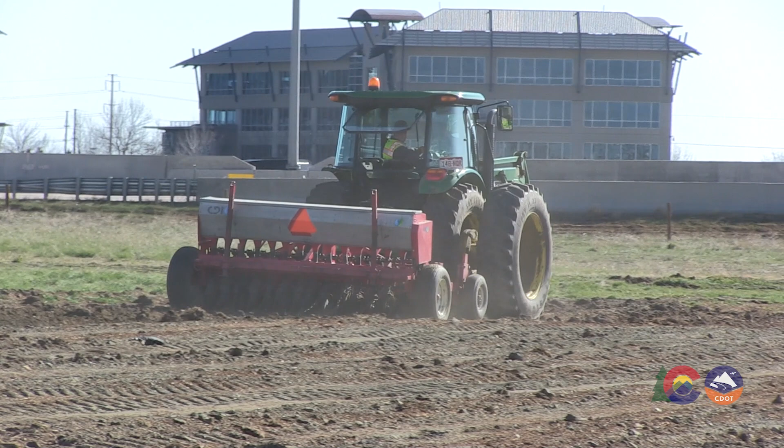What is the drill seeding method? The drill seeding method is a technique used to mechanically plant seed directly into the soil. Drill seeding involves the use of specialized drill equipment that creates small holes in the soil, deposits the seed and amendments into those holes, and then covers the soil over with a roller or chains.

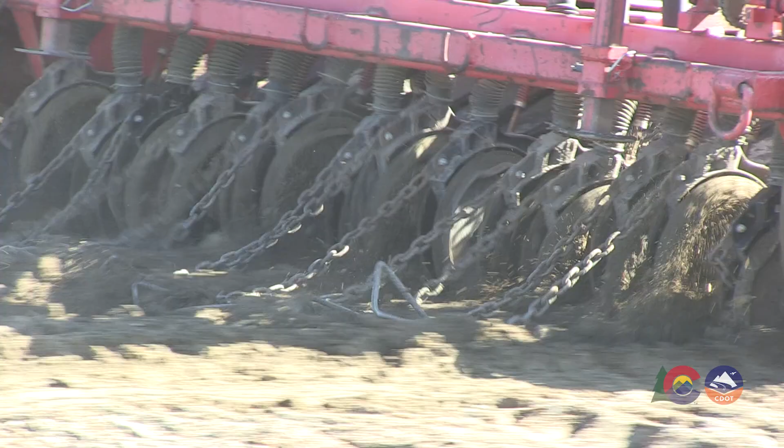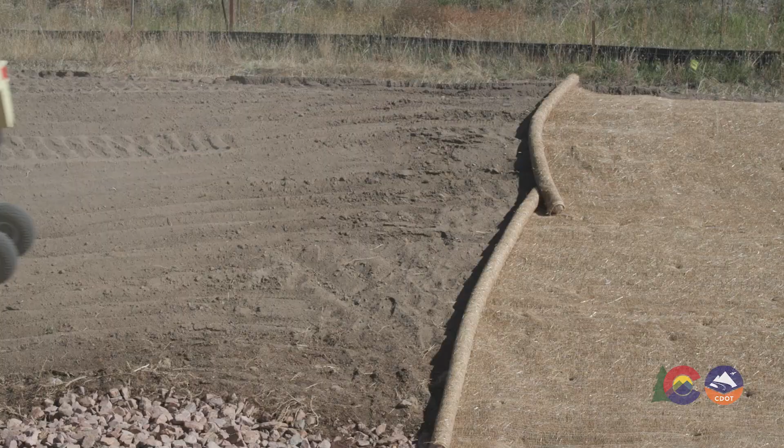This process helps ensure good seed-to-soil contact and improved seed spacing and coverage, which generally provides better germination and establishment than broadcast or hydroseeding. Drill seeding is a precise, efficient, and cost-effective method of planting seed. It can be completed in dry conditions, and unlike the hydraulic seeding method, it doesn't require water for the application. Drill seeding is followed up by final stabilization methods including mulch, crimp, and tackifier, hydromulching, or erosion control blankets.

The audience for this video includes stormwater management plan designers and reviewers, region permanent stabilization subject matter experts, CDOT design engineers, and project design engineers and their designees.

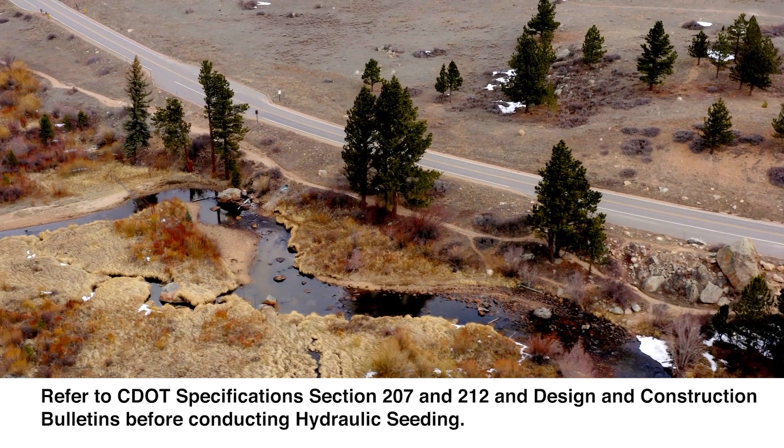Refer to CDOT Specifications Section 207 and 212 and Design and Construction Bulletins before conducting drill seeding. Instructions and guidelines for Specifications 207 and 212 include specific details for subsoil and topsoil preparation, organic fertilizers, soil amendments, seeding methods, and checklists for inspectors.

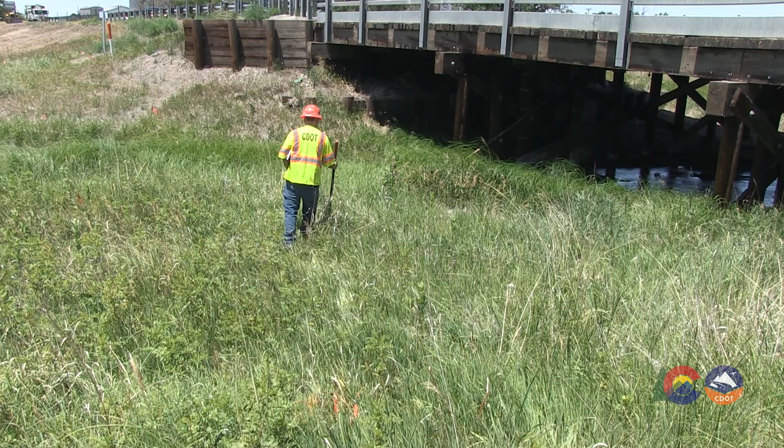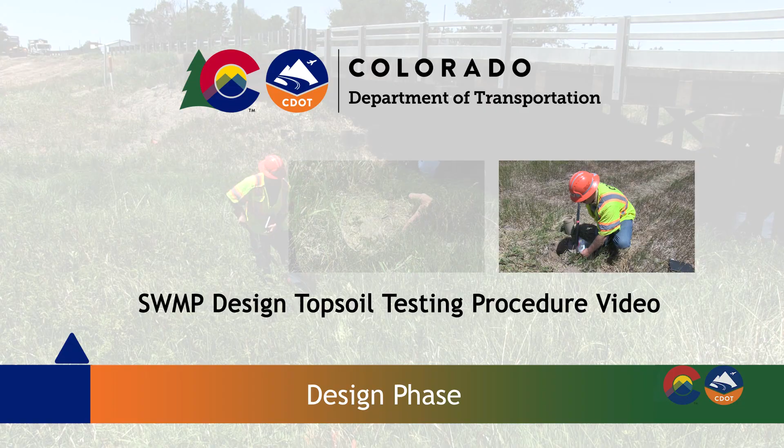The first step is determining seed mixes and amendment rates. For instructions on how to do this, please watch the SWMP Design Topsoil Testing Procedure video. Rates of topsoil amendments are determined in the design phase based on analytical results of the project's topsoil. If not testing site topsoils, then the rates are based on the standard rates in Specification 212. Use your region's standard seed mix for elevation and moisture, or work with the CDOT headquarters landscape architect for a site-specific seed mix and rate.

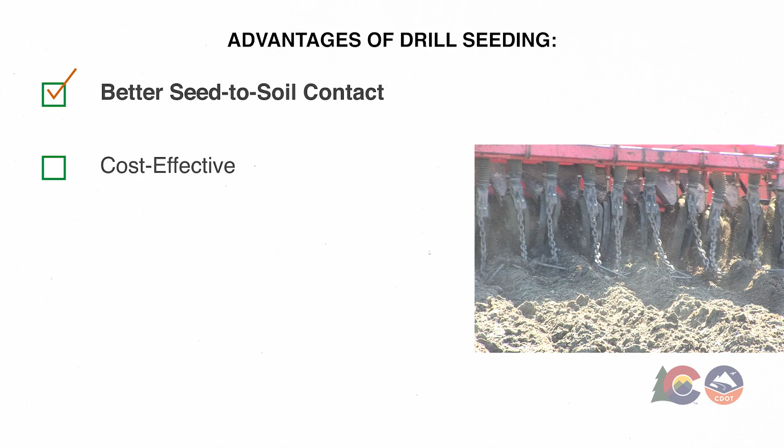Drill seeding is CDOT's preferred method of seeding and offers several advantages for highway construction projects including better seed-to-soil contact, as the seed is placed directly into the soil and is followed by mechanical soil coverage, which can increase the germination rate leading to increased plant establishment. In addition, drill seeding places the beneficial mycorrhizal fungi right next to the seed, aiding in revegetation success. Another advantage of drill seeding is its cost-effectiveness. Drill seeding can place seed and amendments uniformly in a relatively short amount of time.

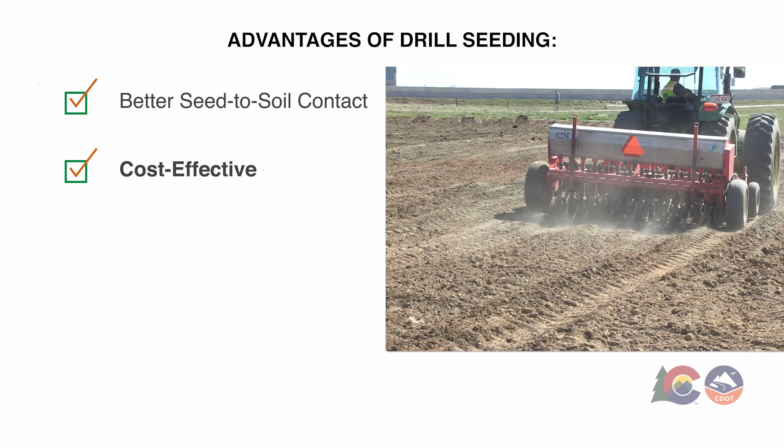It is important to note that while drill seeding can offer many advantages for a highway construction project, it may not be the best option for every project. The specific requirements and constraints of each project should be considered when deciding whether or not to use this method of planting.

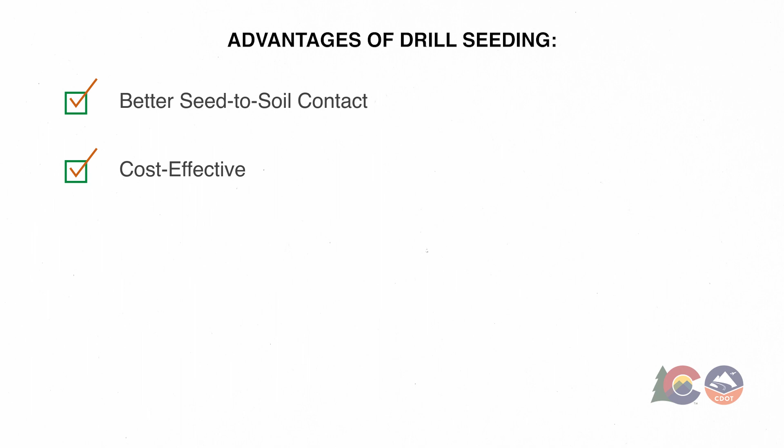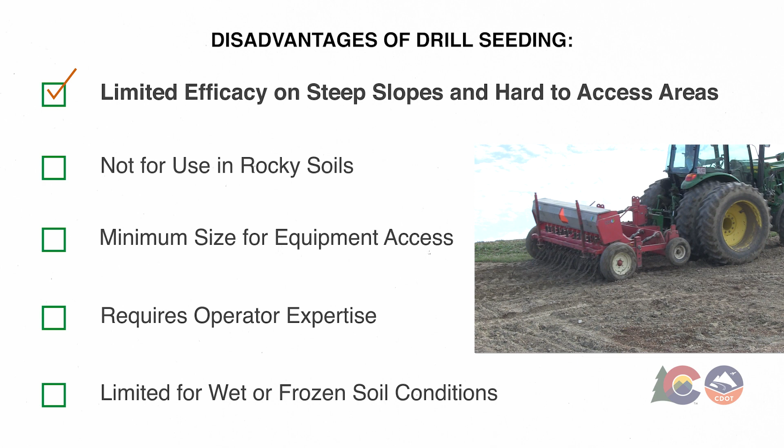There are a few potential disadvantages of using drill seeding for a highway construction project, like limited efficacy on steep slopes, hard-to-access areas, and rocky or clay soils. Drill seeding equipment cannot access steep slopes over 2.5 to 1. Drill seeding cannot be conducted in rocky soils due to potential damage to the equipment. In clay soils, the equipment is unable to get the calibrated depth effectively.

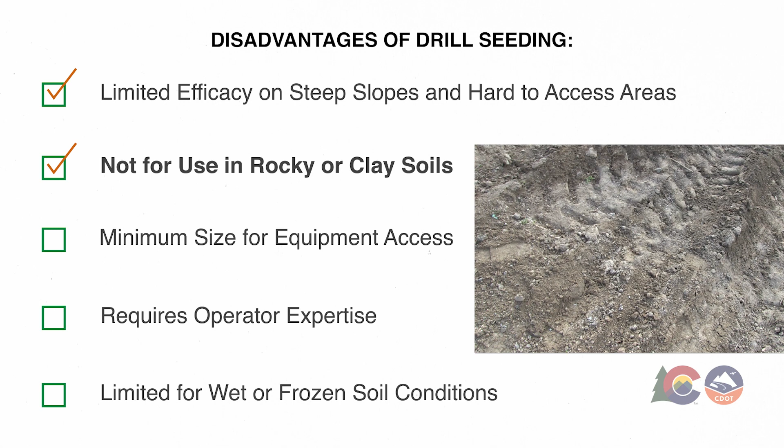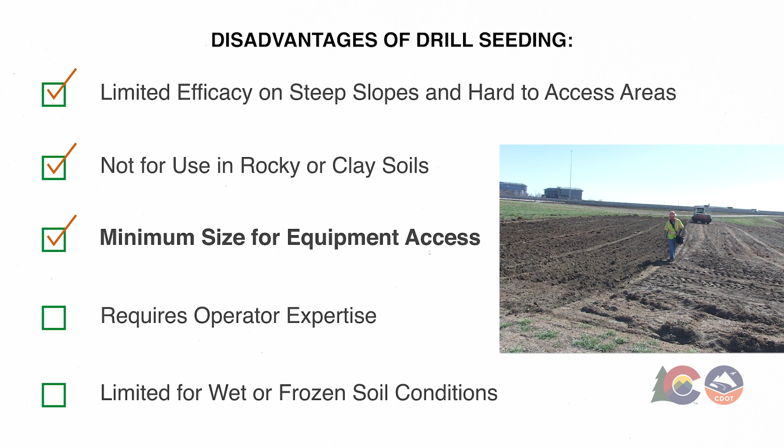Due to cost of mobilization and access of equipment, drill seeding should be conducted on sites half-acre or greater and where there is sufficient space for equipment to access. It requires operator expertise for calibrating the equipment. It is limited for wet and frozen soil conditions.

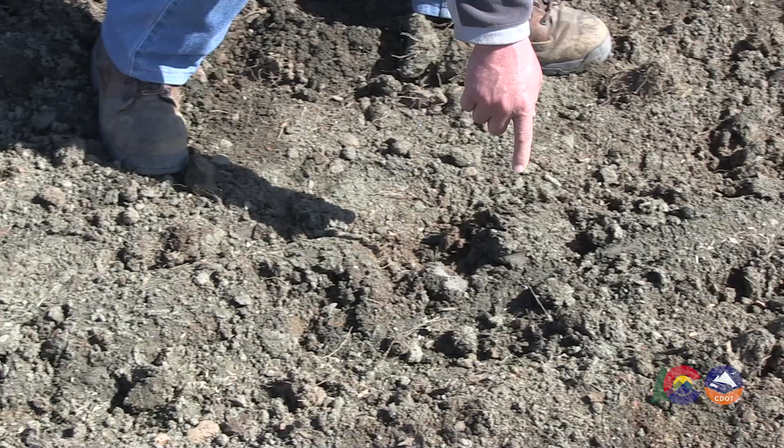Drill seeding should not occur when soils are wet or frozen. Working in wet soils leads to soil compaction. Drill seeding should not be conducted in frozen soils, as the drills may not be able to penetrate the soil and the seed may not be deposited at the correct depth. In addition, the equipment will compact the soils. High winds: seeding should never be conducted during high winds.

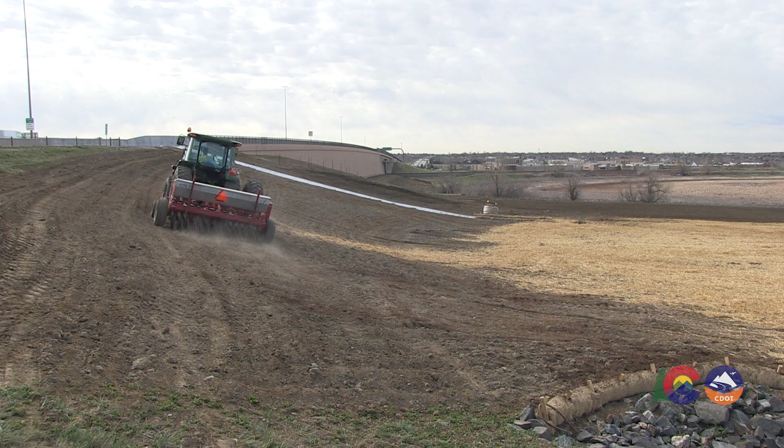It's important to note that although there are some disadvantages, these can be mitigated with proper planning, equipment, and execution of the project. For hard-to-access areas, rocky soils, and steep slopes, the hydraulic seeding method should be specified for installation.

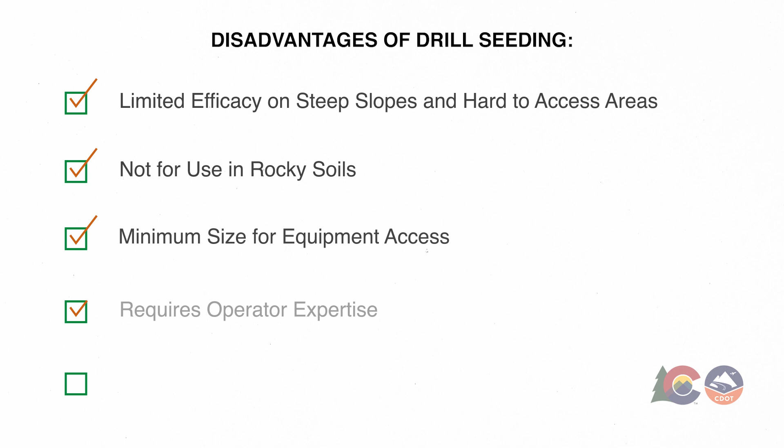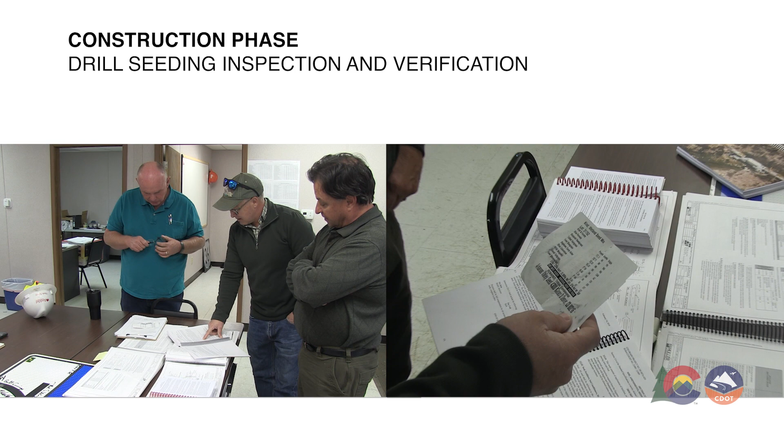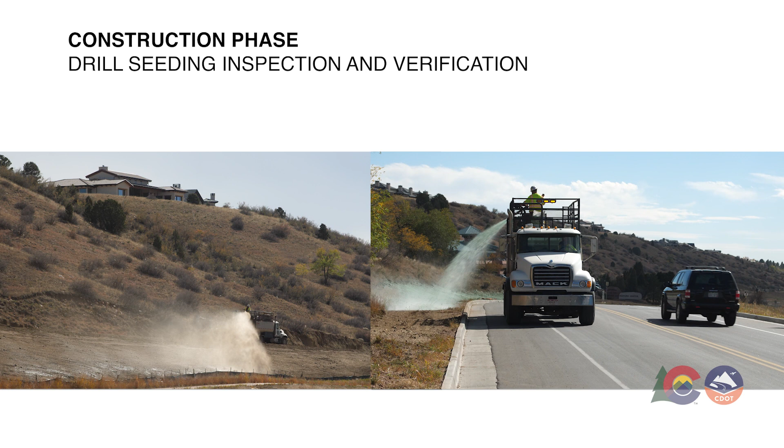Construction phase. Drill seeding inspection and verification. Whether you are a reviewer or inspector, review the contractor's method statement, baseline schedule, and milestones for timing, equipment, and quantities of seed and amendment and their storage needs. Application of organic fertilizer, soil amendments, and seeding should be milestones in the baseline schedule.

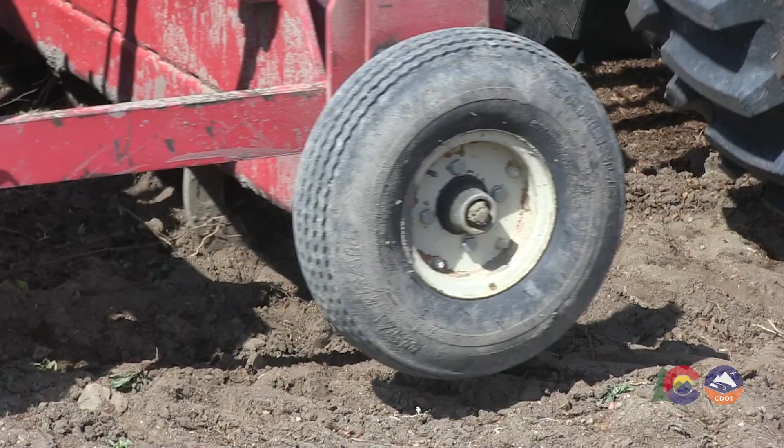The timing of seeding is crucial to the establishment of desired vegetation. It is important to seed during the seeding seasons in Section 212. After topsoil placement, seeding and final stabilization activities must occur within 4 days. Final stabilization, including straw crimp and tackifier, mulching or erosion control blanketing, must occur within 24 hours of drill seeding.

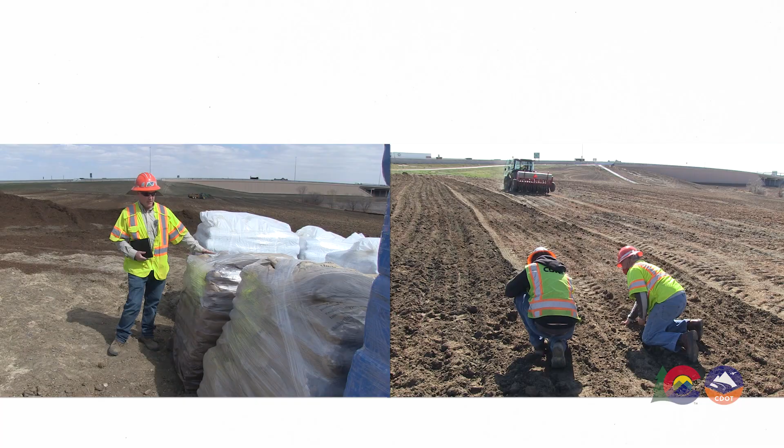Seed should match the species and rates shown on plans. If there are substitutions due to availability with suppliers, work with your region's permanent stabilization subject matter expert for approval of the substitutions. Inspection and verification. Refer to the construction manual for guidance and checklists to assist in review of seed, amendments, and the drill seeder calibration.

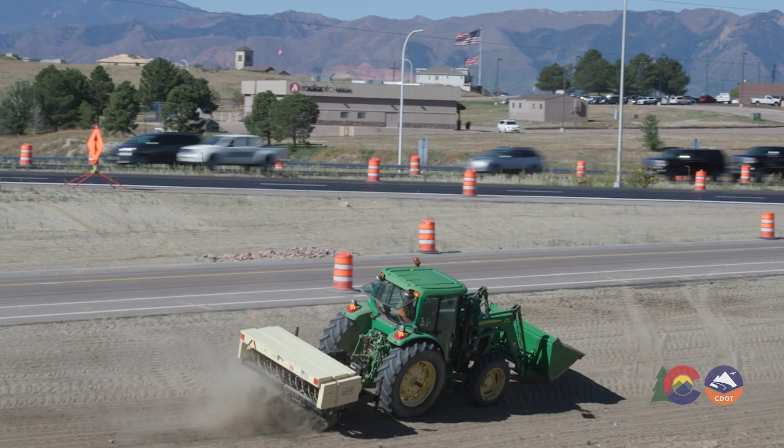As discussed in the Specification 207 Subsoil Preparation video, soil decompaction is a critical component in addition to topsoil preparation to ensure the success of drill seeding and resulting vegetation. Conduct a site inspection. The seed bed should be free of stones and other debris greater than 4 inches in diameter. Review the vendor's packing slip of seed.

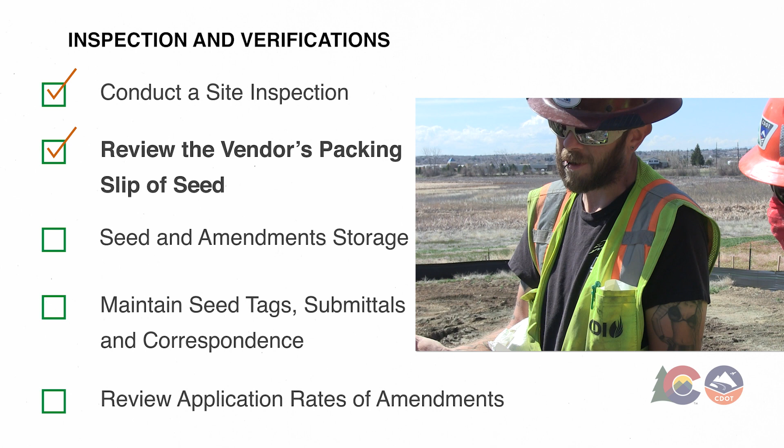Confirm the seed has not been in possession of the contractor for greater than 30 days. Reject seed bags over 30 days old. The packing slip needs to include a copy of the purity and germination report dated within 13 months of date of seeding. Proper storage of seed and amendments.

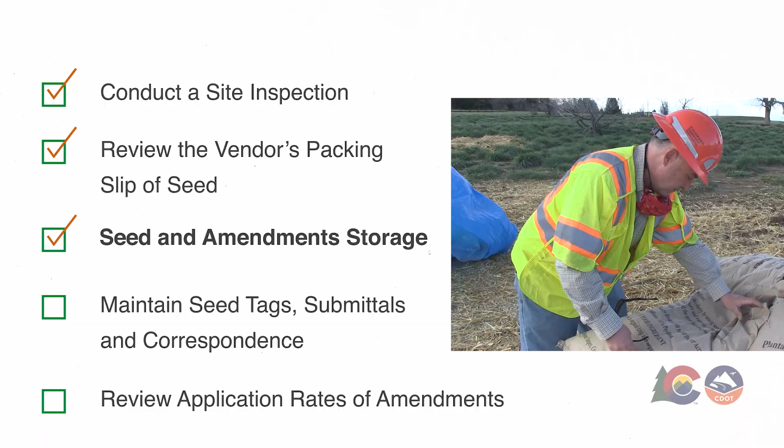Seed and amendments are to be stored out of direct sunlight, surface water, and precipitation, and not in temperatures over 80 degrees that can destroy biotic life in the amendments or reduce the germination of seed. Reject wet, moldy, or damaged seed and amendment bags. Save in the project record seed tags, submittals, and correspondence.

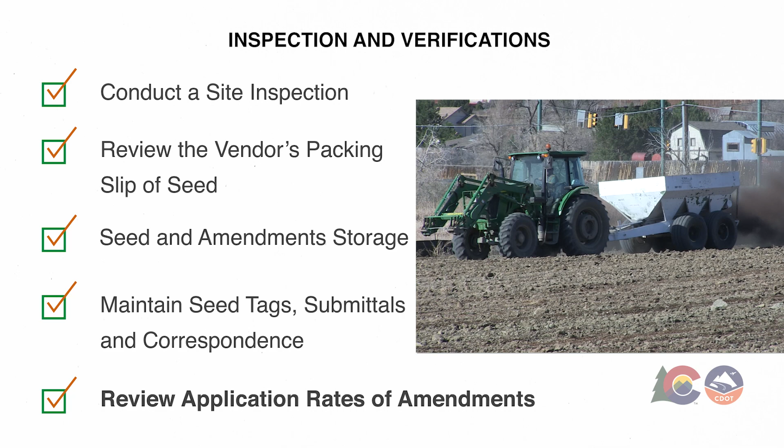Review application rates of amendments. Refer to the contract for quantities of organic fertilizer and topsoil amendments. Seed should match the species and rates shown on plans. Work with region permanent stabilization subject matter experts to help verify seed mix and rate, approve seed and amendment submittals, and answer any questions that may arise during construction.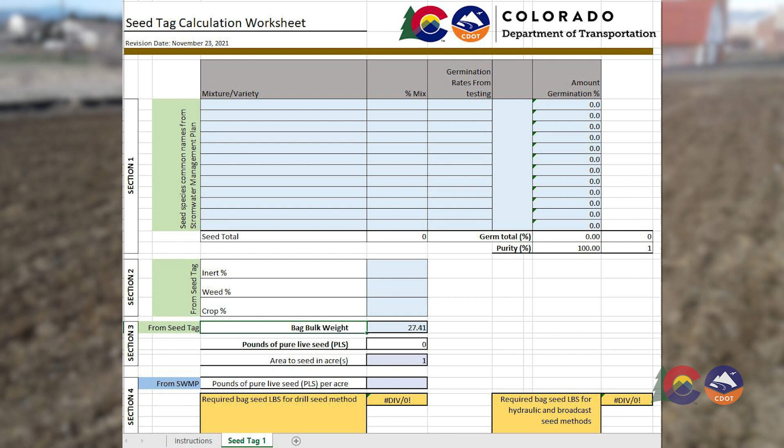A seed tag calculation worksheet and seed and amendment quantities checklist are available on the Landscape Architecture website. Review 212 Drill Seeder Calibration video. Overall, the inspection and verification of drill seeding is crucial for ensuring that the equipment used for seeding is in good working order, that the seeding method is performed correctly, and that the seed and amendments are being applied at the correct rate.

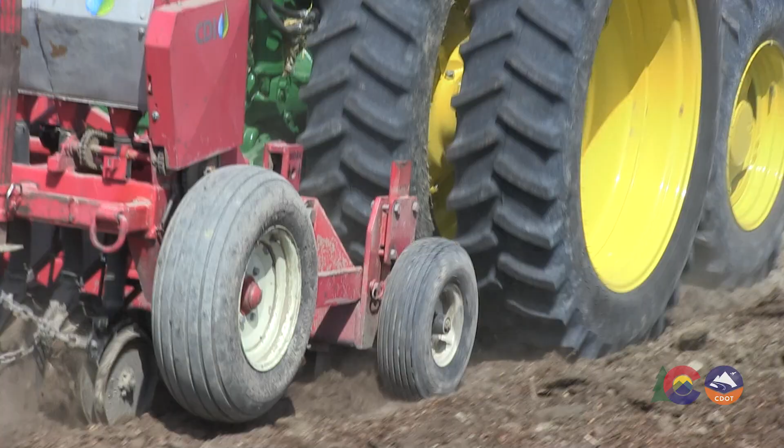Maintain proper topsoil surface conditions per Section 207. The seed bed or topsoil surface should be left in an uneven condition with a surface variation of 2 to 4 inches. This helps prevent erosion, but also creates various microclimates to help with germination. Do not work in frozen or wet soils or during periods of high winds.

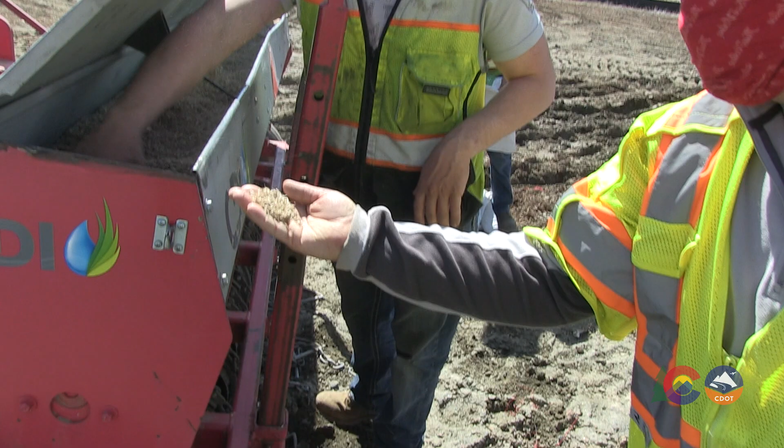Review application rates of amendments. Refer to the contract for quantities of organic fertilizer and topsoil amendments. Seed should match the species and rates shown on plans. Seeding rates should be as specified in the plans. With seeding, more is not better.

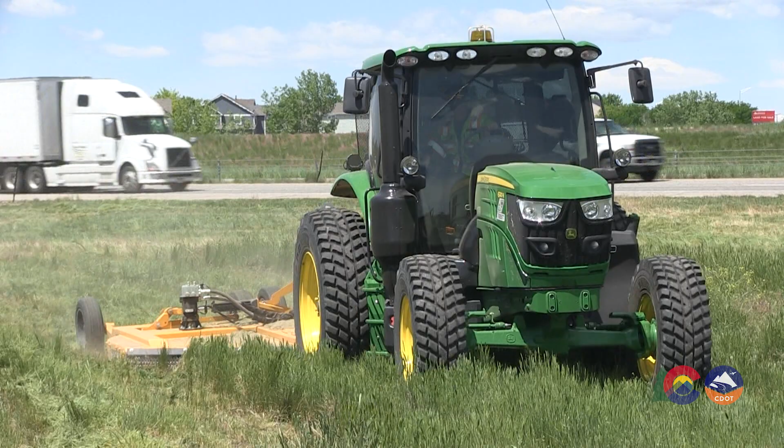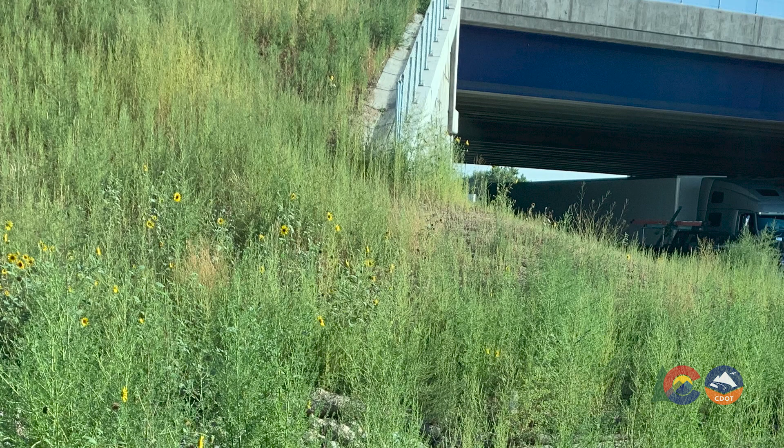Adding too much seed results in a vigorous initial establishment, but in the long term, there will be less vegetation due to the seedlings' competition for sun, air, nutrients, and water resources. Underapplication of seed can lead to increased growth of weeds where surface soil is exposed, as well as increased potential for surface erosion.

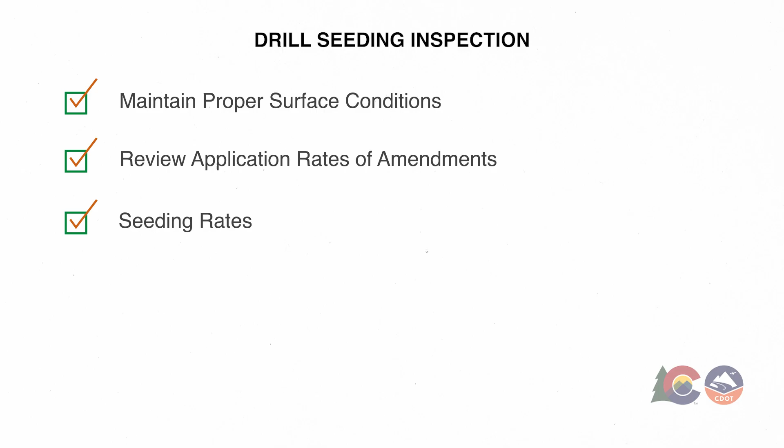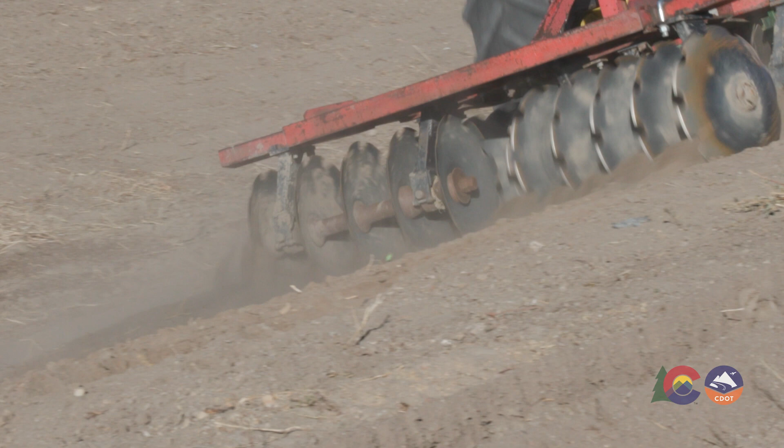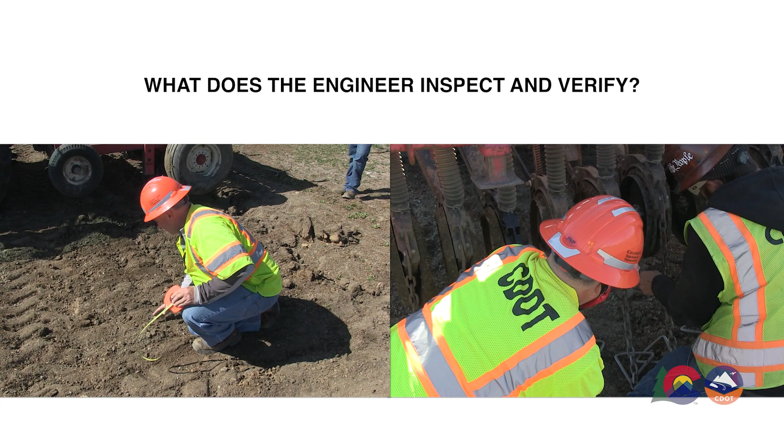As discussed in the Specification 207 Subsoil Preparation video, soil decompaction is a critical component in addition to topsoil preparation to ensure the success of drill seeding and resulting revegetation. What does the engineer inspect and verify? The inspection and verification of drill seeding method is crucial for ensuring that the equipment used for the seeding process is calibrated and in good working order, that the seeding process is being performed correctly, and that the seed and amendments are being applied at the correct rate.